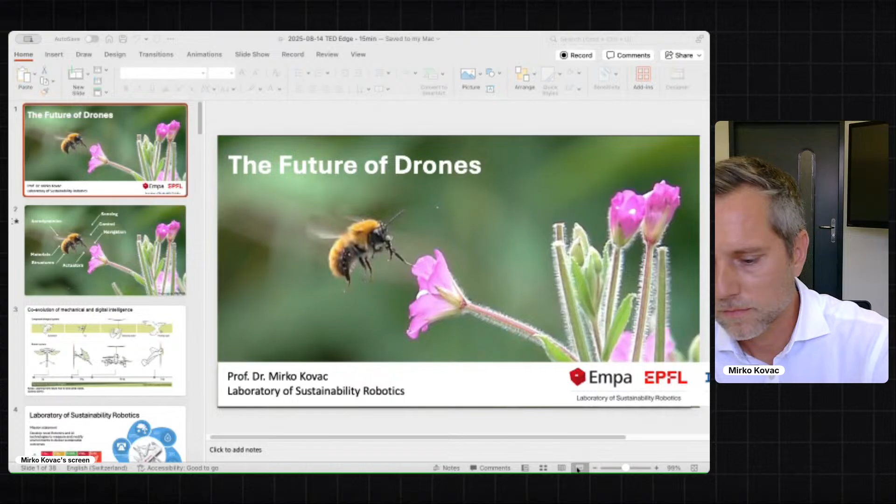The future of drones, I believe, is a lot about biology and about the integration with biology. What we see here is not a drone, it's a natural system - an insect, a flying insect. There's a lot that we can learn from them, for example how they fly, how they're built, and how they operate in unknown, constrained outdoor environments. There's a few things that they do very well.

For example, they combine sensing, control, and navigation. Sensing from their antennas, their structures, the sensory system, from the eyes, from the other sensors that they have. They then control it with neural networks and navigate using various modalities. And then they integrate this with aerodynamics and very complex flapping wing aerodynamics, in fact, which they master very well.

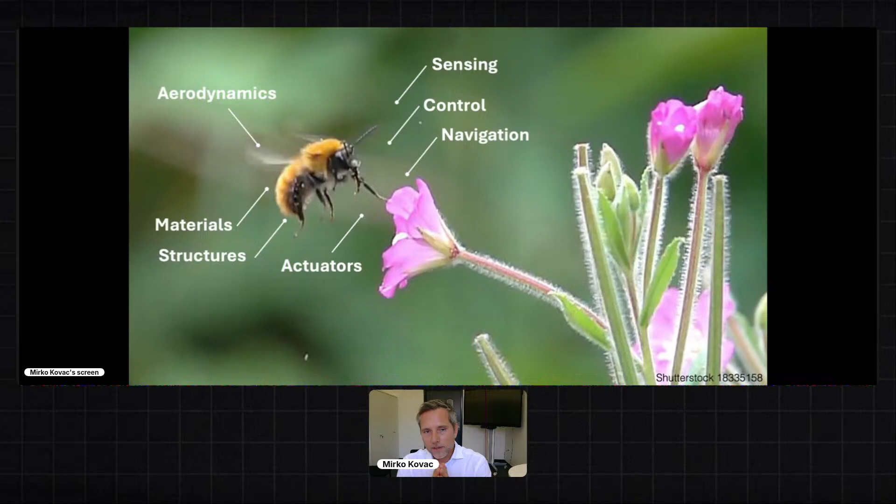They also use various materials, soft structures, actuators and muscles to allow them to fly, move, and engage with the environment. The important thing here, I think, is that they co-evolve all of this. They don't start with an empty shell, a body with motors and actuators, and then add the control onto it. They co-evolve the learning, the control, the sensory system, the muscle system, and the structures and materials all together as they grow, as they interact with the environment.

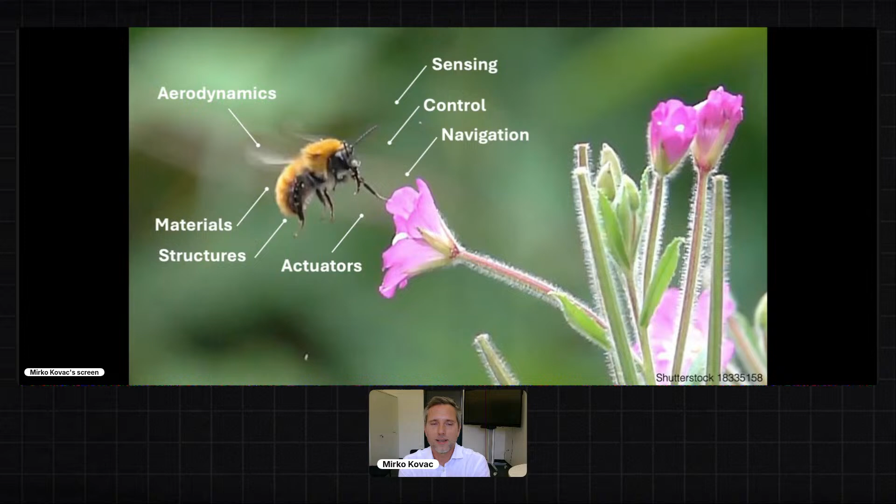I think this is something that is often missing in the way robots are built. Robots often start in simulation, then get tested in a laboratory, and then get translated outdoors in a rather linear manner. But here we have very much a circular development philosophy, if you can call it that, which allows these insects to move very efficiently outside.

But I think we can learn a lot and also develop robots in a similar manner. If you take an example of a robot that attaches to a surface, that wants to perch and land on the surface, like the perching eagle, we can build that into a robot using a control system and sensor system, allowing it to pitch up and do a deep stall maneuver to attach to the surface. This requires control, sensing, planning, deep stall maneuvers, flight control, and so on.

However, when we get very small in size, such as the RoboBee, which is less than a gram in mass, we can benefit from other methods. In fact, we can benefit from the mechanical intelligence methods that many insects use. Bumblebees or flies, for example, use their antennas and legs to adjust and attach to the surface. It's a mechanically mediated transition where the mechanical body and morphology are used to enable this transition, making it a mechanically intelligent way of doing so.

So we can think of this as a spectrum from mechanical intelligence to digital intelligence. And I believe that if you want to create lifelike vehicles, lifelike robots, we need to integrate and benefit from both to create a true lifelike intelligence.

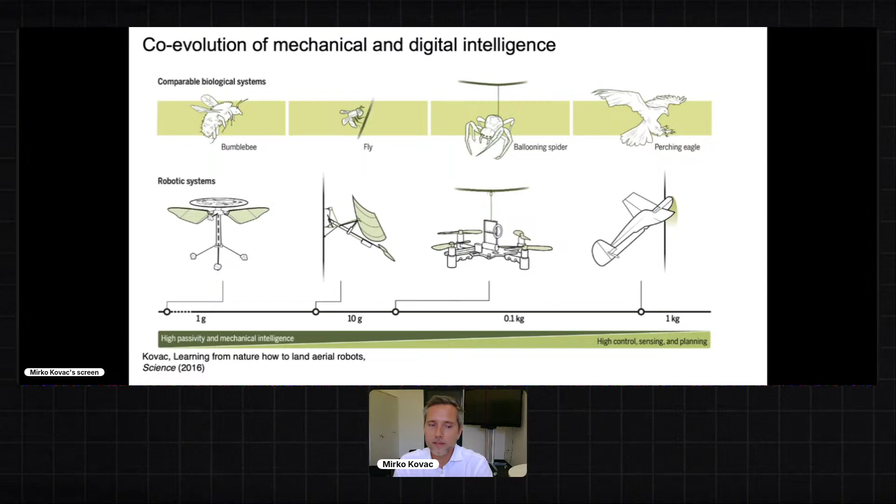This is exactly what we have been working on for about 15 years in the laboratory at EMPA and EPFL, but also previously at Imperial College London in the aerial robotics lab that I was setting up and leading before that. The idea is to create a robotic Swiss army knife, a robotic capability that can collect data and monitor climate, water, forests, smart cities, infrastructure, and also interact with and modify those environments.

For example, doing repair tasks or other tasks like planting, smart agriculture tasks, forest health, forest maintenance tasks to really protect and maintain those environments. Now, if we want to do that, we need to be able to deal with various environments. And one of those environments, of course, is air.

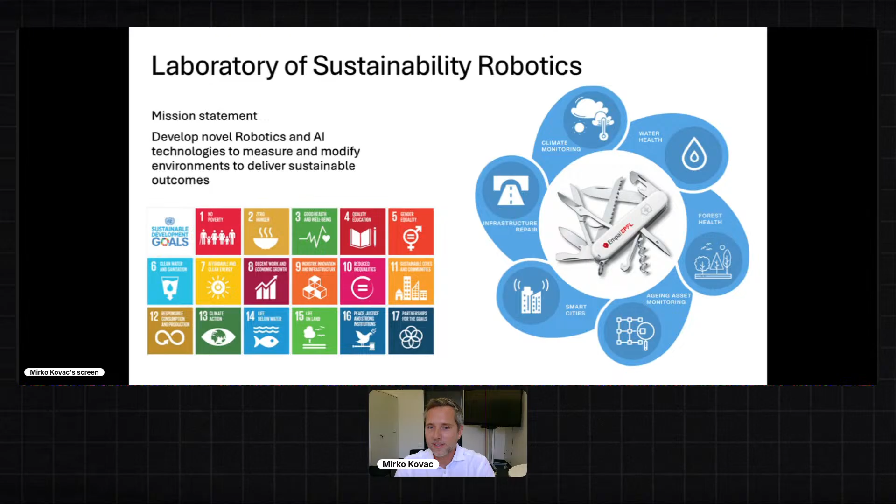Air is a very natural environment for aerial robots, but it is very complex because of the fluid mechanics, turbulence, and so on. So here's an example of how we think about sustainability robotics in an aerial domain.

We can have a flying vehicle that then launches small sensory vehicles, sensory agents, like micro robots that are being deployed in the natural environment. Those agents then sense the environment, sense the biodiversity, sense physical parameters like temperature, light, irrigation, and so on, and can provide the intelligence needed to get insights onto the climate and onto the biodiversity in those environments.

Eventually, those vehicles can not just be manufactured and then be used, but they can also biodegrade, so they can have a targeted death in the environment, then integrate back into the material of the ecosystem, so being compostable or biodegradable, and then eventually even regrowing. So can they heal? Can they reproduce in a way that they would regrow and then be used again?

So this is the larger vision for this approach, which we call the transient robotic life cycle, where the robot is like an animal integrated into the natural life cycle.

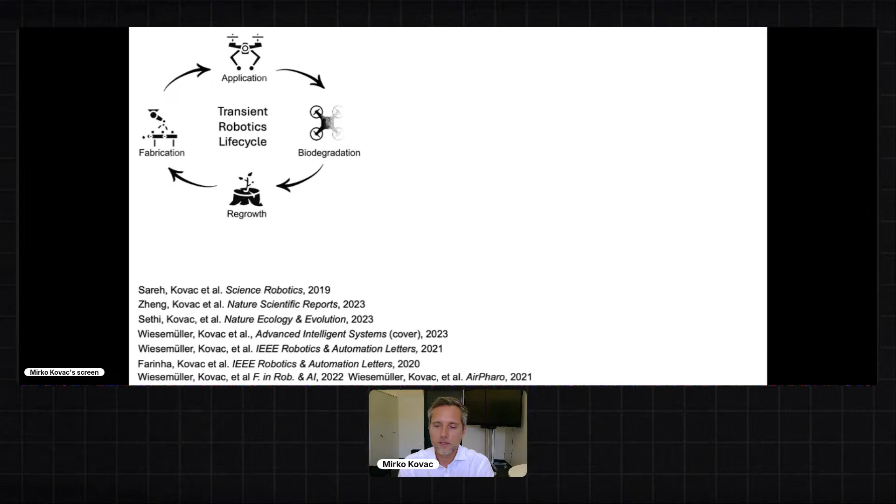So here's a robot that does part of that, which is to fly, then detect a spot where it wants to place a sensor, and then can launch a sensor, model the trajectory, and place it with a precision of a few centimeters at a few meters distance.

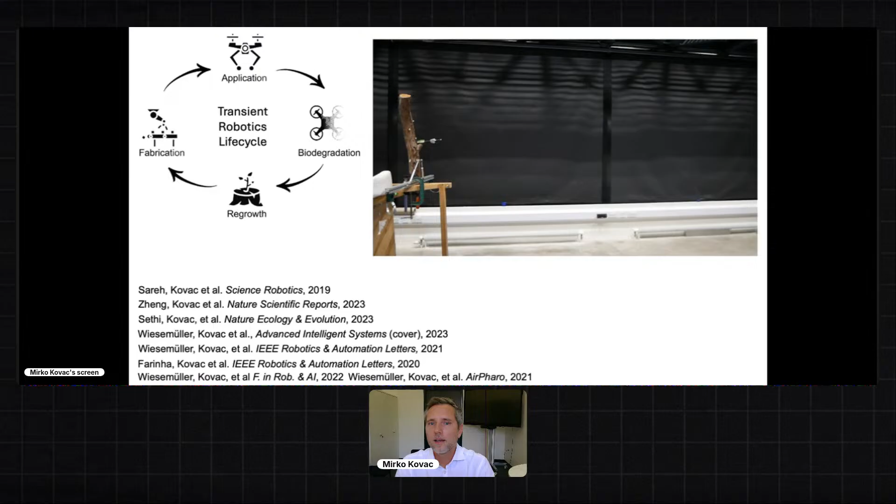This allows it to place those sensors quite effectively at height, where usually people would need to climb up and place the sensor manually, which is expensive, risky, and time consuming. Because of that, a lot of the environment is undersampled, so not enough data is there.

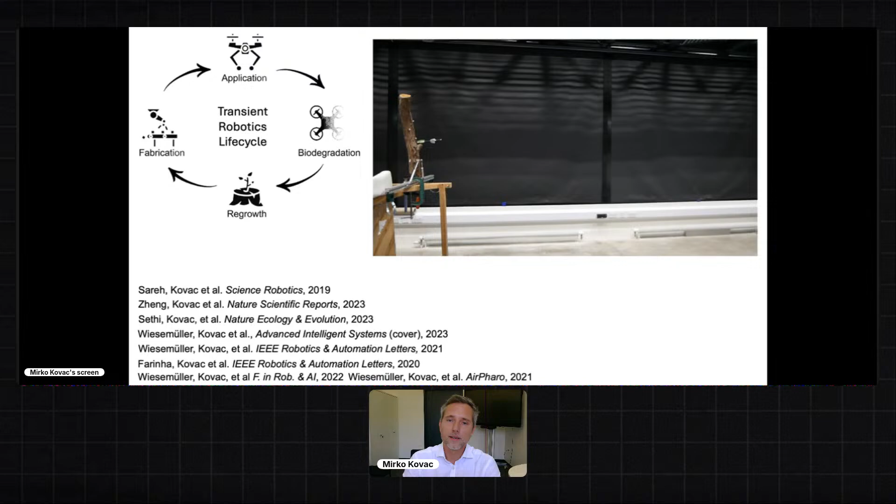But by using flying vehicles, like here in the forest, that would then fly and place those sensors, we can collect data that is unprecedented, data that is novel and abundant, allowing us to measure the biodiversity and various environmental parameters.

Which environmental parameters do we want to measure? Of course, it can be various physical or biological parameters. Maybe it could even sample the surface of the tree.

But the first modality we went for in this example is to measure the bioacoustics. So this means it has a microphone, then collects environmental data, and this data is then analyzed using machine learning algorithms to identify which bird species are there and how many of each species are there.

There are two parameters called abundance and species richness, and we can measure that across the layers, so across the height or in the canopy here in the trees. Basically, this allows us to study and quantify where the birds are and how many there are.

This is a really important metric in order to study how climate change influences the bird populations, how noise pollution influences them, how chemical pollution or human activity influences them. And by knowing that, we can better protect those environments.

So the robot becomes a tool that allows humans to collect data quickly, get insights, and then design the policies to really protect those environments.

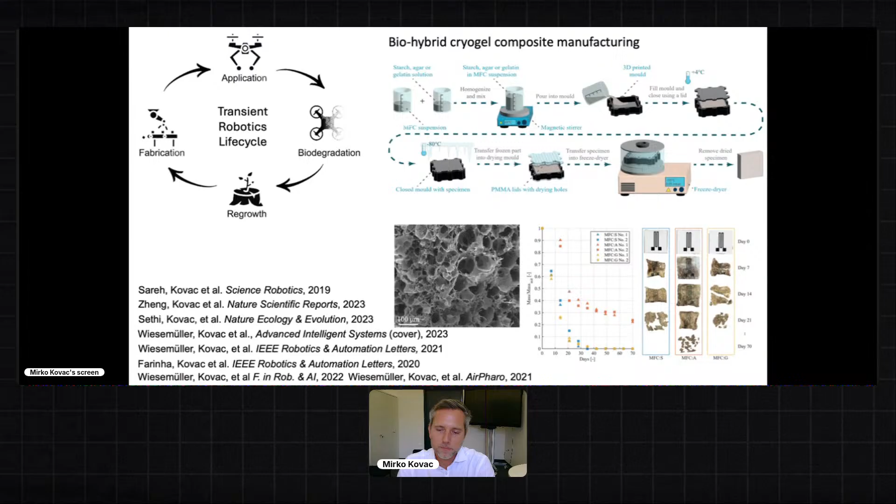Eventually, in the near future, this is about having static sensors, static robots that just sense certain parameters in the environment. But in the mid to long term, they can become agents that are robotic by themselves, that move through the environment using environmental vectors such as rivers or animals, but also move by themselves using humidity-triggered actuation or other methods that are fully materially enabled without the need for motors or batteries. The material science itself informs or enables the structures to move or adapt, becoming intelligent robots in those environments. There are a lot of open questions to achieve that, but it's a really promising field developing now internationally.

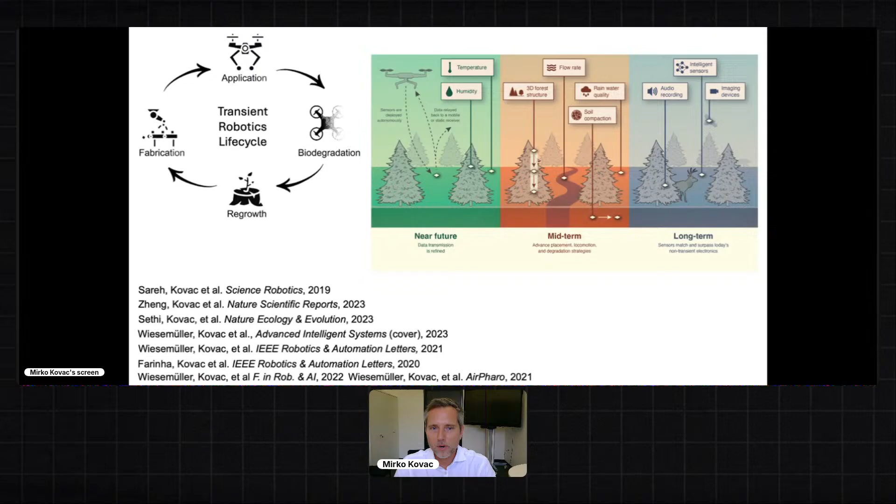The second environment, which is also very important for us, is water. In the water we want to measure, for example, temperature or acidity, which is important for coral reef protection, but also biodiversity - knowing which animals are there, what microbes or microorganisms. Are there any invasive species that don't belong to the ecosystem? Or is there microplastic pollution or chemical pollution in those environments? Can we collect environmental DNA to measure and quantify what is happening inside the water?

This is something we've worked on for many years now, about 15 years. We wrote a book, which you see here, and some papers related to that. The overall vision, shown in this top picture, is building completely soft metamorphic robots that can fly in air, but then transition into the water, move underwater, and transition back to flight, or transition into sailing abilities, saving energy for long duration sampling of the environment.

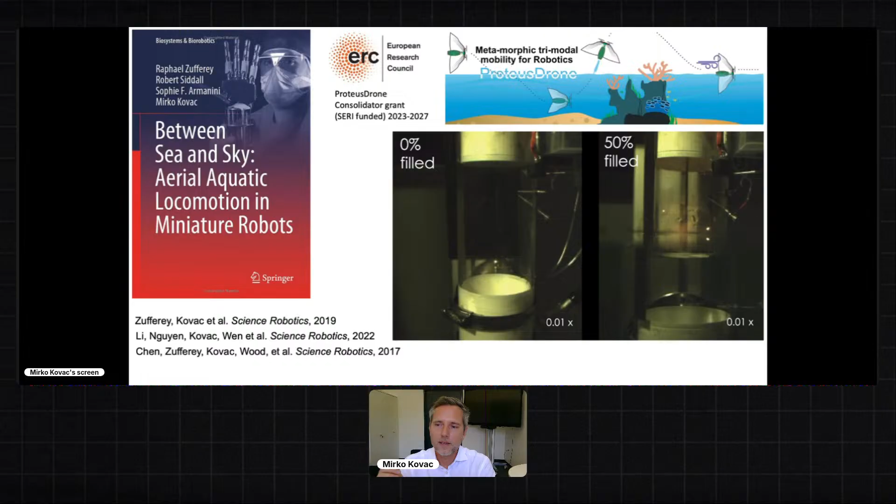Let me give you 2-3 examples here. Number one is this idea to have an impulsive exit from the water. We built a system where we use calcium carbide that reacts with water, creating acetylene gas. This acetylene gas mixed with air can then be ignited and can eject the water from the body of the robot. By doing so, it can boost the vehicle from underwater into the air quite efficiently and effectively, with a very high thrust boost - a bit like a water rocket that has a combustion to boost the water out. You have the spray, then the gas jet that follows, and then a glide phase of about 26 meters using only 0.3 grams of calcium carbide. It's a quite powerful combustion that is happening.

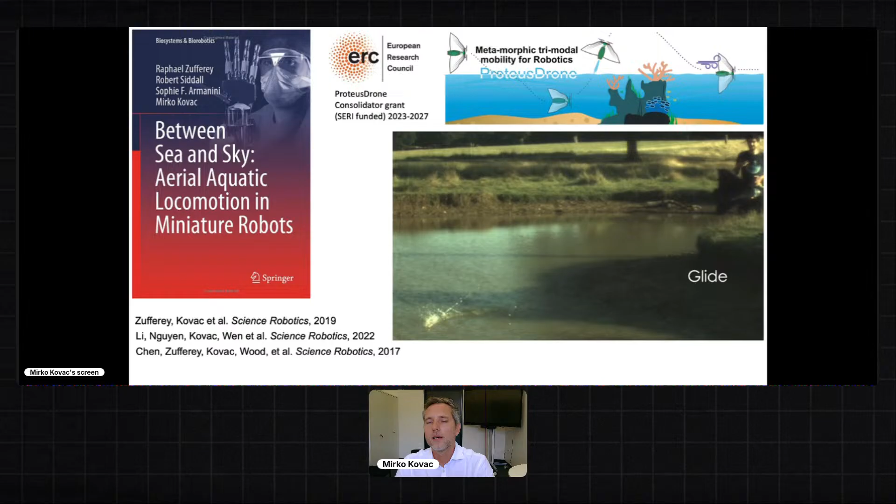Similarly, in collaborative work here with Harvard University, who work on this RoboBee - the size of a real bee, but a robotic vehicle - we looked into ways to have this transition happen effectively. Here it uses an electrode that splits the water into hydrogen and oxygen, which can then be ignited, again giving a bubble that bursts out of the vehicle, allowing it to jump out of the water. Again, impulsive transition from underwater to air using combustion-based methods, which are very high power, and can be used for that quite well.

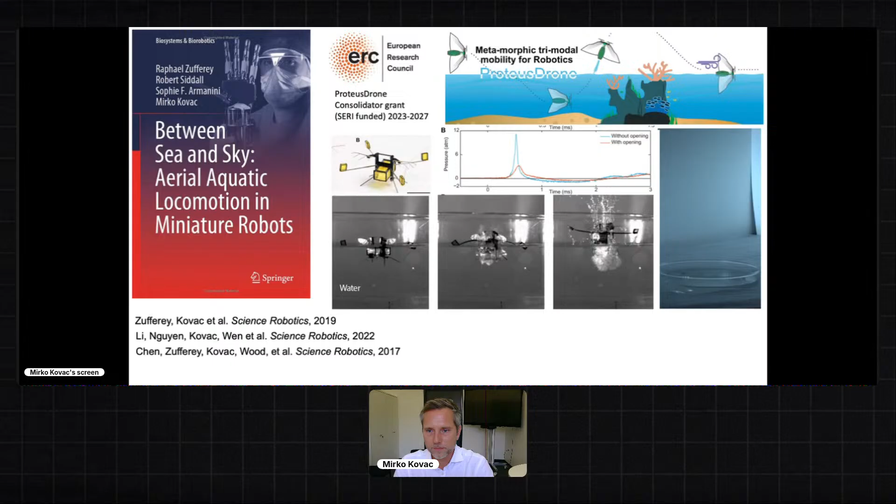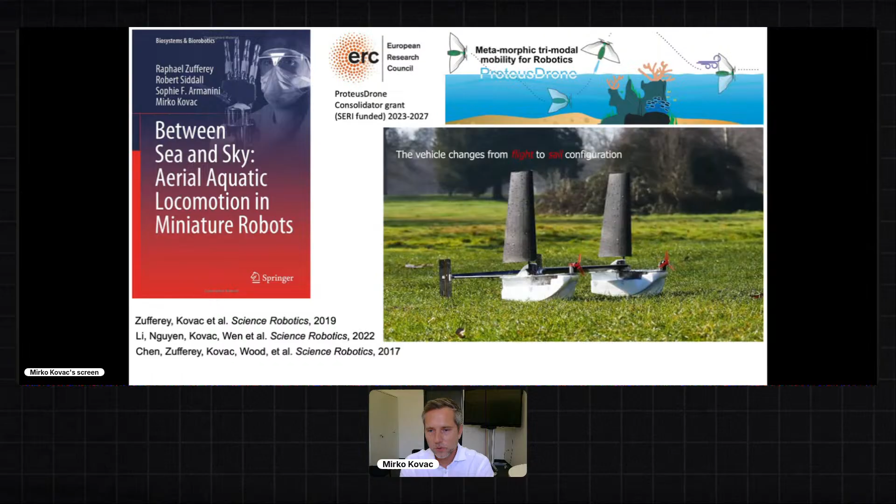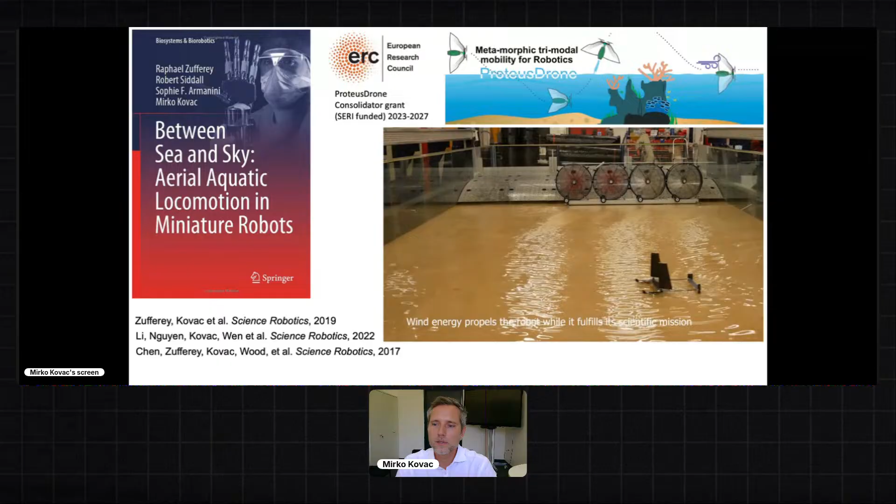Now, once in air, it can keep on flying, or it can land on the surface and then sail. To study this transformation from flight to sailing, we built this SailMAV vehicle - sailing micro-air vehicles. The idea is that it lands on water, reconfigures into a sailing configuration, and then uses a custom flight controller to sail on the water surface autonomously.

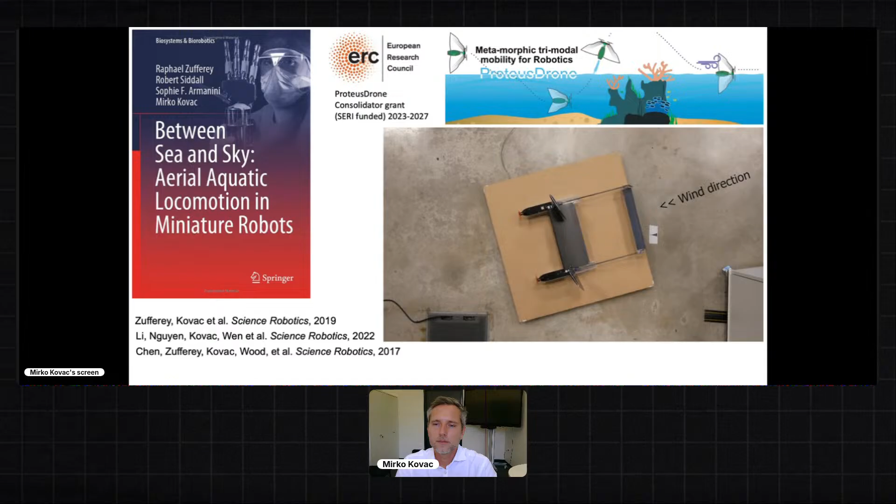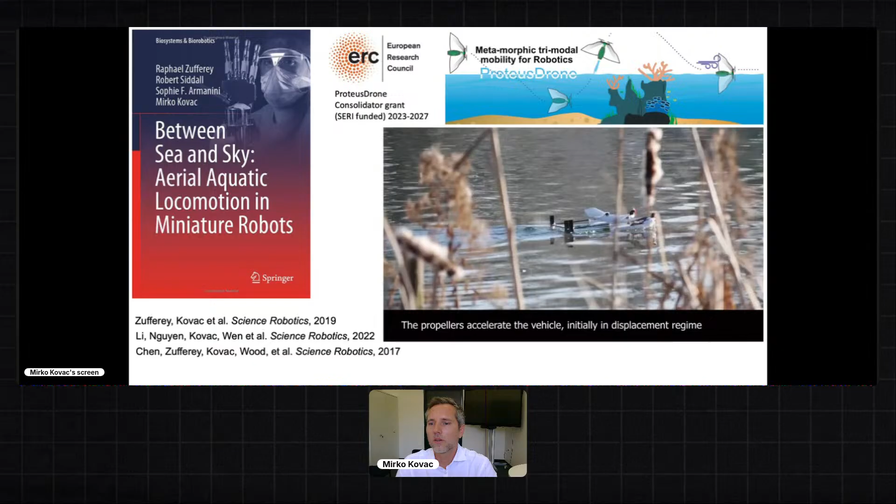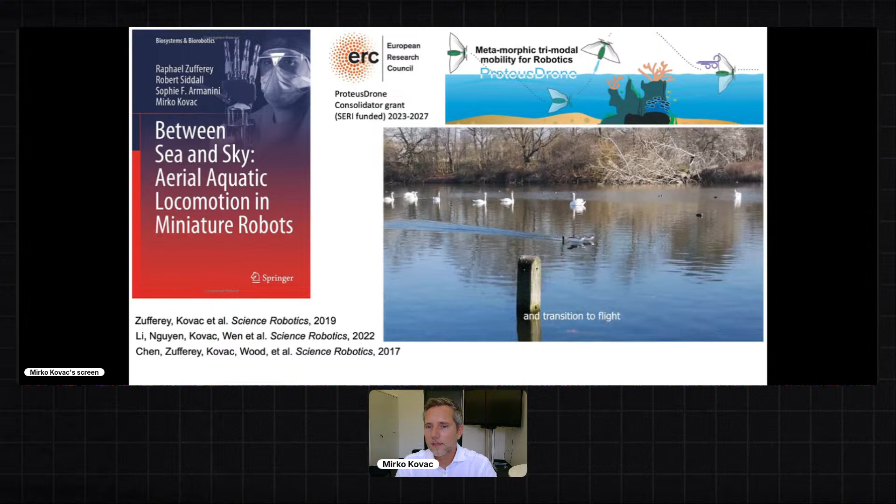The vehicle itself is built from scratch - the design as well as the manufacturing of the wings, the structures, the fluid mechanics, even novel sensors that needed to be integrated, and the flight controller are developed specifically for this vehicle. It then enables motion on the water surface using propellers or sailing, then transitioning into hydroplaning and ground-effect-assisted takeoff. A lot of the fluid mechanics is not known at this scale, so we had to do a lot of fluid mechanics studies to understand and optimize the vehicle.

This vehicle, I think, is a good example of how we can think about sustainability robotics, where we go all the way from concept to systems to data-based insights. Here the concept is aerial aquatic transitions, reconfiguration for sailing. We then build the robot, optimize it, test it in the laboratory, test it outdoors, and collect environmental data like soundscape data.

This gives us insights onto the bird populations in summer and winter in disturbed and protected environments, showing that there is a quantified measurement of increased bird species populations and diversity in the protected environments across seasons. This is a valuable insight that really helps us protect and accordingly make policies to protect those environments.

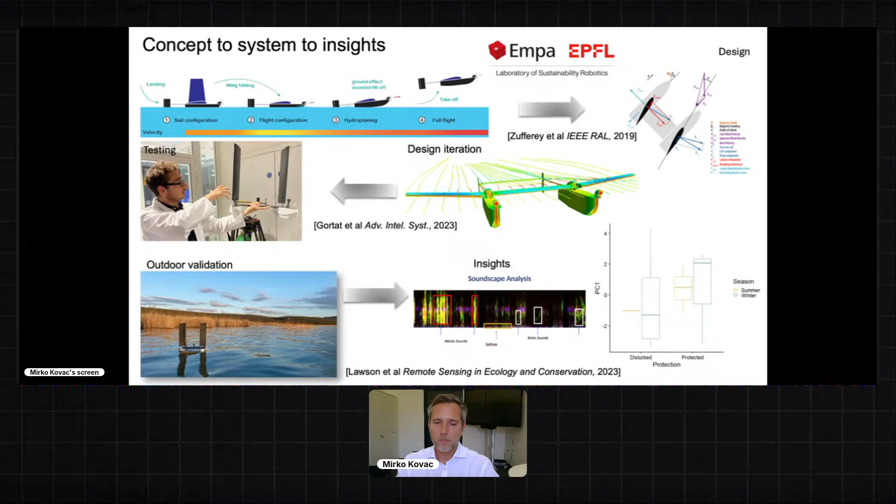The third environment is, of course, Earth. And the question is, how can we do Earth shaping? Can we use Earth to manufacture structures? Now, this is something we are also working on for about 13 years now.

We built various robots with the idea that they would collectively 3D print structures from flight. So they would fly, maybe collect environmental material, and then print and 3D print those shelters, support infrastructure, habitats in inaccessible environments here on Earth, but also maybe on the Moon, and also in inaccessible mountain environments or natural environments, or anywhere at height where it is dangerous and difficult for humans to access.

Of course, naturally, we start with the biological review of how biology builds, and there's a few key methods that biology uses that can be really very useful for robots too.

For example, using templates, which is using local initial conditions for the manufacturing process, and then robotic rules or instincts that allow it to scale from those initial conditions. Equally, decentralized controllers with emergent properties based on the material or mechanical design of the robots, or local interactions with the environment or with the agents themselves can allow for emergent properties in the construction process.

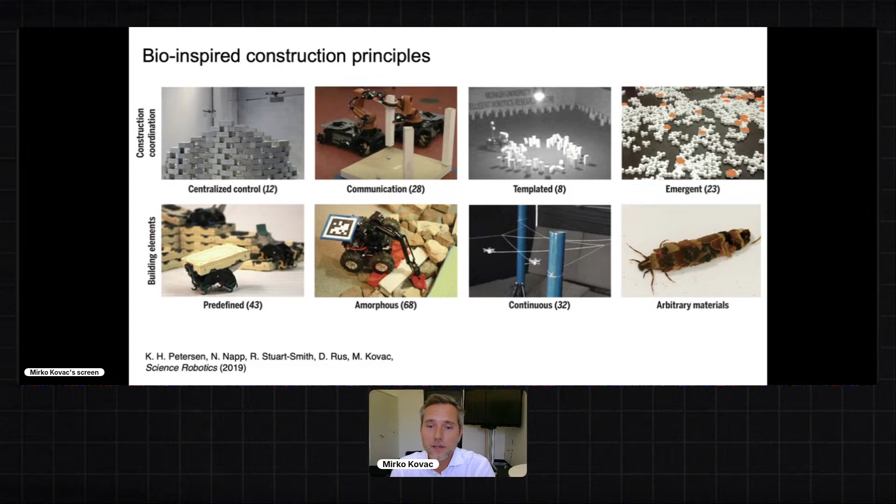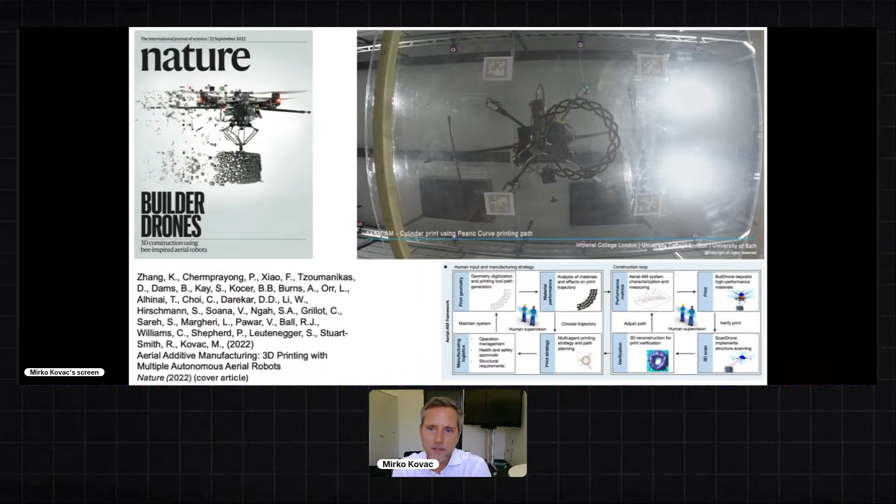So the robot we built, here an example, is a flying vehicle that can stabilize an extrusion head and deposit material from flight. Here it does that with a precision of a few millimeters and can extrude high-performance cement material to make layers, and like this make and build larger three-dimensional structures. So this is aerial additive manufacturing, or aerial 3D printing, as we also call it.

It is autonomous. It uses its own controller, its own design of the mechanics, its own architecture of building, and its own material that all needs to be co-evolved in order to achieve that.

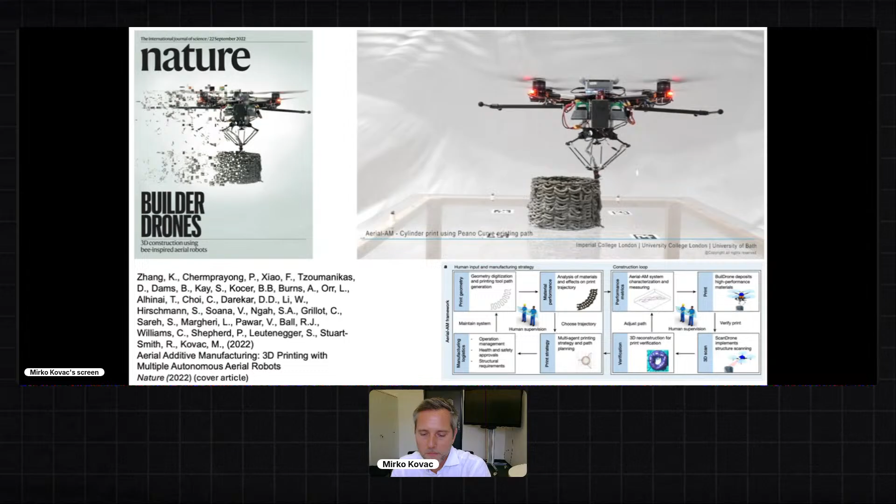So if you use a different material, such as here polyurethane foam, we can do so and then build structures maybe even at larger scale, because the material expands, and like this can give layer heights that are higher. The problem is, however, that the material expansion is very difficult to predict.

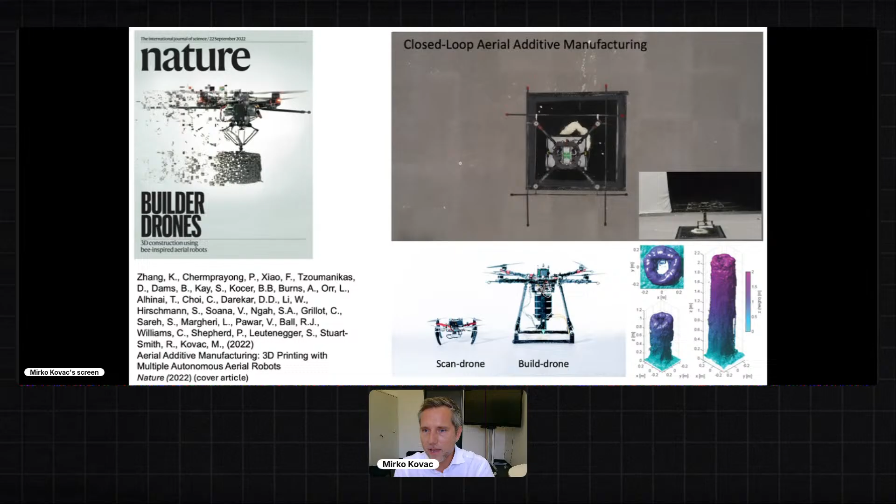So it could expand, but then we need to adjust the next layer of the printing process accordingly to then have the next layer in the process.

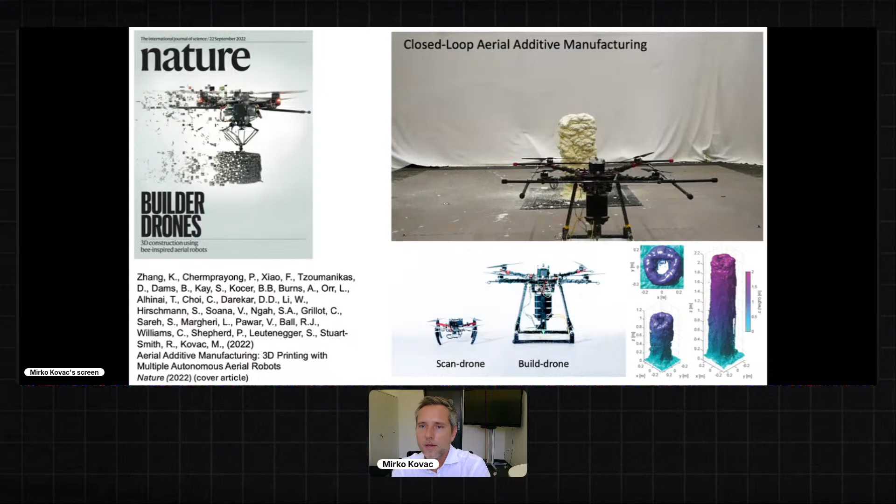So this is what we call here the closed loop aerial additive manufacturing, where the scan drone, so the scanning vehicle, collects the three-dimensional information and extracts the ridge line and adjusts the printing step such that it can scalably build different layers and build larger structures.

So the goal is really to have the monitoring of the process, the quality control, and adaptation of the process in the loop.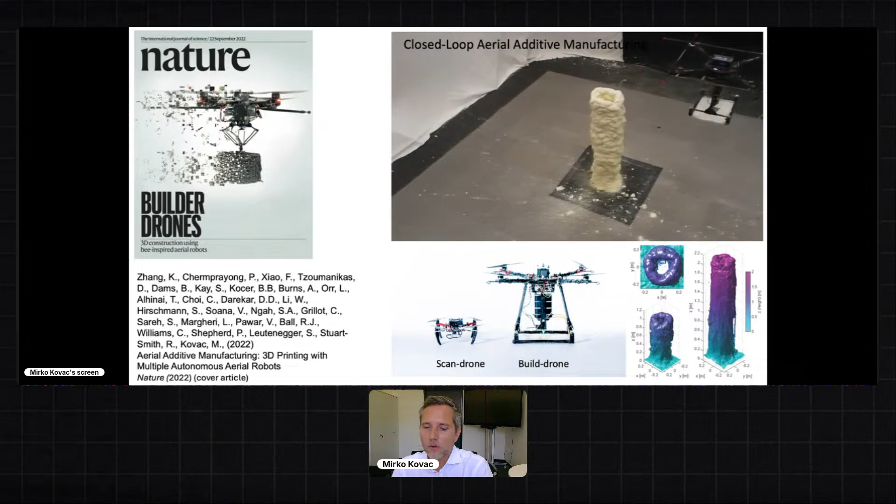We also went to the Architectural Biennale in Venice in 2023, where we showcased that with the question of how such a process could really affect architecture. So how can architects now build differently, assuming the capability that we have swarms of those flying vehicles that collectively can build larger structures? So it's a new method which allows for new design freedoms as well.

And I think this question is a very interesting intersection of architecture and robotics.

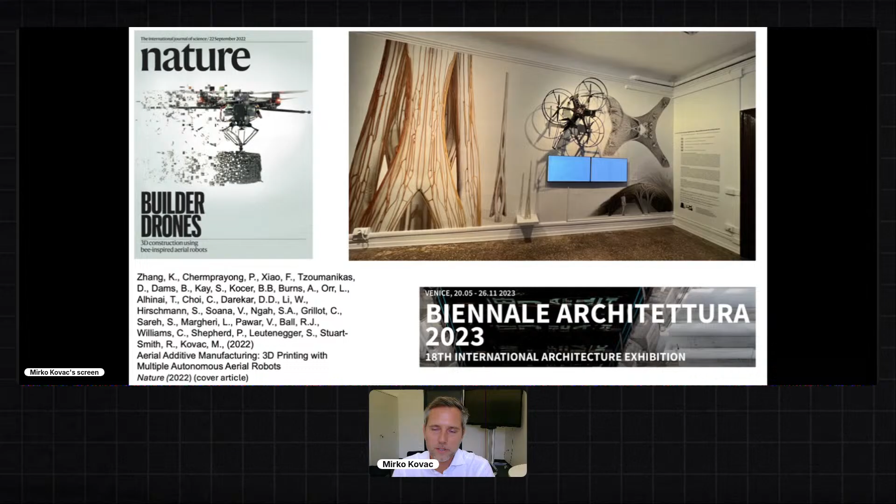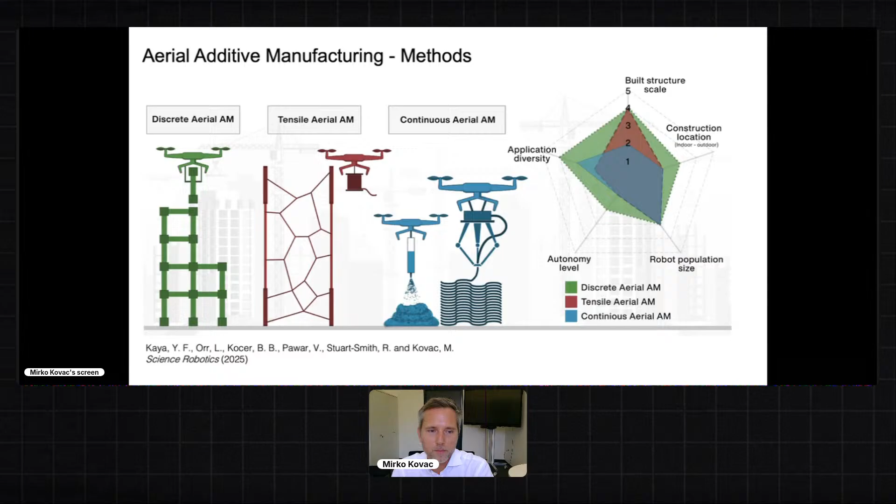Now, besides this continuous aerial additive manufacturing, there are also tensile, like web structure manufacturing, or discrete assembly of structures. And we work on those as well, but for time reasons, don't include them here.

What I would like to mention, though, is the autonomy, whereby most starts with just a simple pre-programmed trajectory, then the aerial physical interaction, or maybe online flight planning and manufacturing task planning. So this is a lot of pre-programmed behaviors.

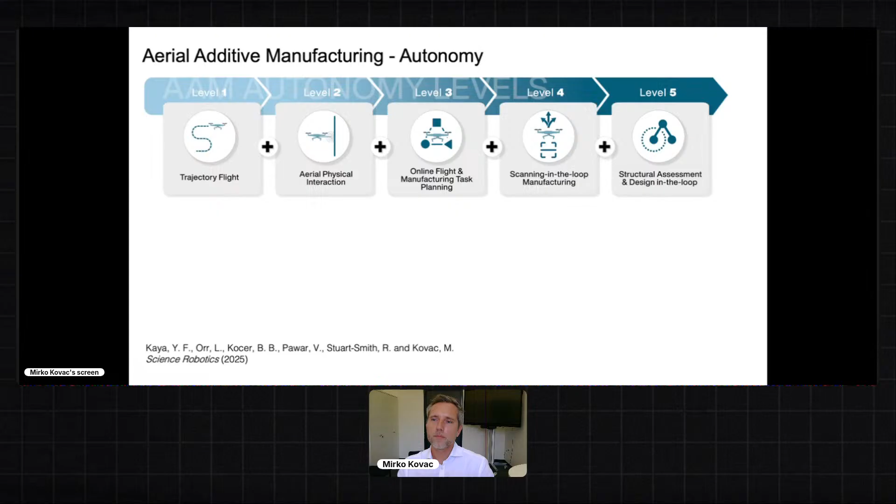But at level 4 and 5, we get into closed loop or multi-agent scanning in the loop manufacturing, where it scans and then adapts the process, or even does a full structural assessment and design in the loop. So can robots do the whole design process based on what they have built already?

So most of the work in this field is actually about level 1 and 2, and maybe 3, and we are now starting with this level 4, with this scanning in the loop process, with the goal to then go to level 5 of fully autonomous design and structural assessment in the loop.

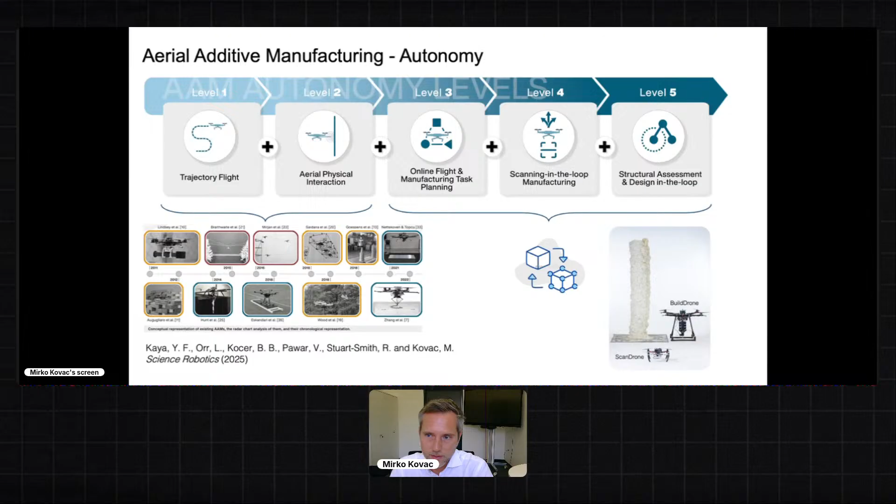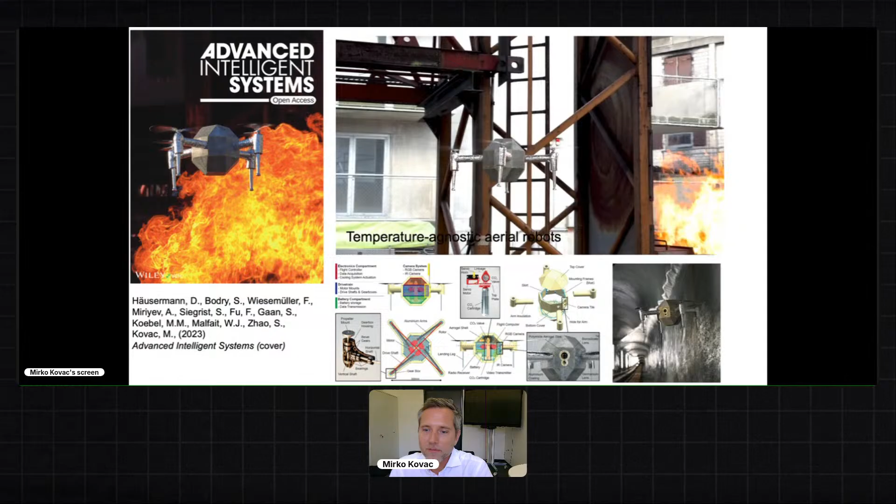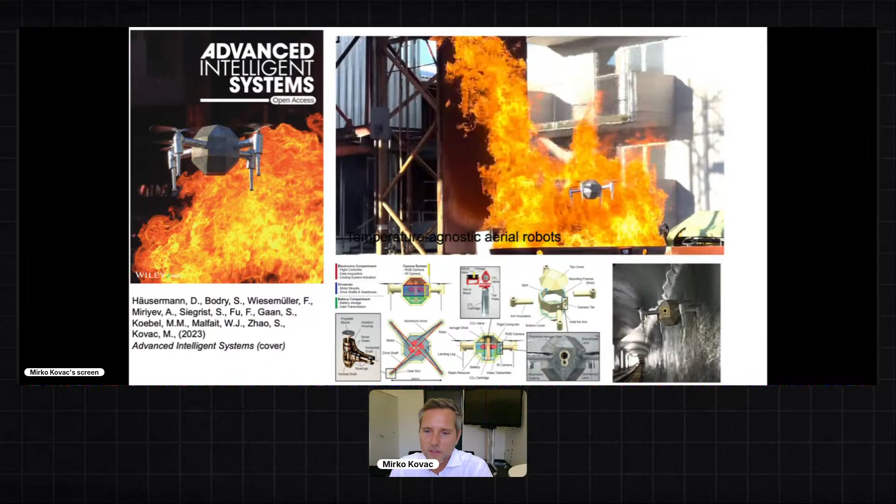So the fourth element is fire. And fire, of course, is challenging and has inspired us to create a robot that can fly inside of very hot environments or in and around fire. The system here is built using a novel type of material called fiber-reinforced polyimide aerogel, which is very heat resilient, and combined with a cooling system and the mechanical design of the robot, it can allow the vehicle to fly in very hot environments, above 200 degrees, where it can monitor forest fires, building fires, or hot industrial environments.

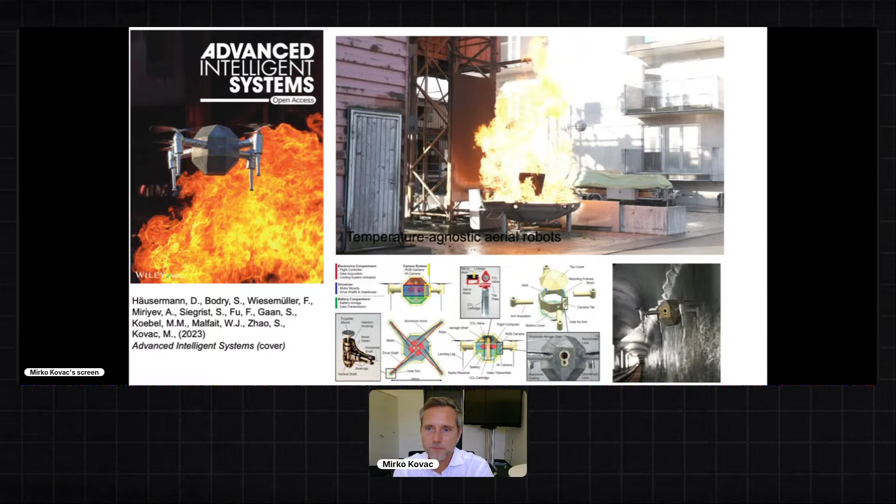This is something we have been working on for quite a few years, and we are now also doing a spin-off called Fire Drone, which has received quite a lot of support and industrial traction. It's really an example of how novel drones with co-evolved materials, structures, and applications can bring value, being lifelike systems for inspection of challenging environments.

This really brings us to the fifth element. Now, what is the fifth element? It's the innovation, the creativity, the free mind that can manifest these different ideas, various robotic and AI solutions, to the world. But it's also an element that connects people, that aligns ideas and visions of different people alongside the applications and the value chain in society.

So I'd like to mention two aspects of that. The first is the philosophy of development of those vehicles. We wrote a paper a few years ago on this co-development of material science, robotic structures, chemistry, computer science, and materials to create those lifelike robots. This co-development method we call physical AI.

The second aspect is bio-inspiration. In 2014, I wrote a paper on how to do biological inspiration, calling it the bioinspiration design paradigm, where we take inspiration from biology, then abstract the principle, then build it into the robot using the best of our engineering knowledge. I think the combination of this design method with the co-evolution of disciplines is the key to creating lifelike robots.

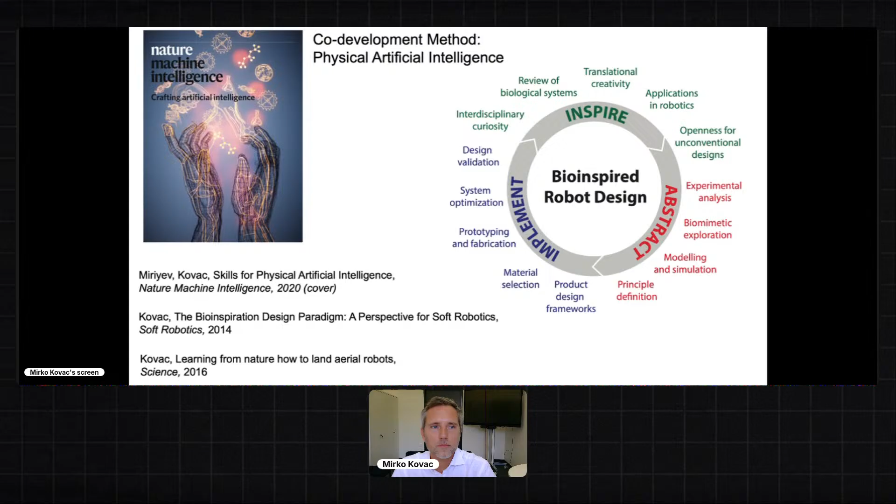The second aspect I would like to mention is the testing infrastructure. There are a lot of indoor test environments, flight arenas, and so on around the world, and a lot of outdoor environments as well. But there is really a gap between them, of environments that are protected, instrumented, but representative of outdoor environments.

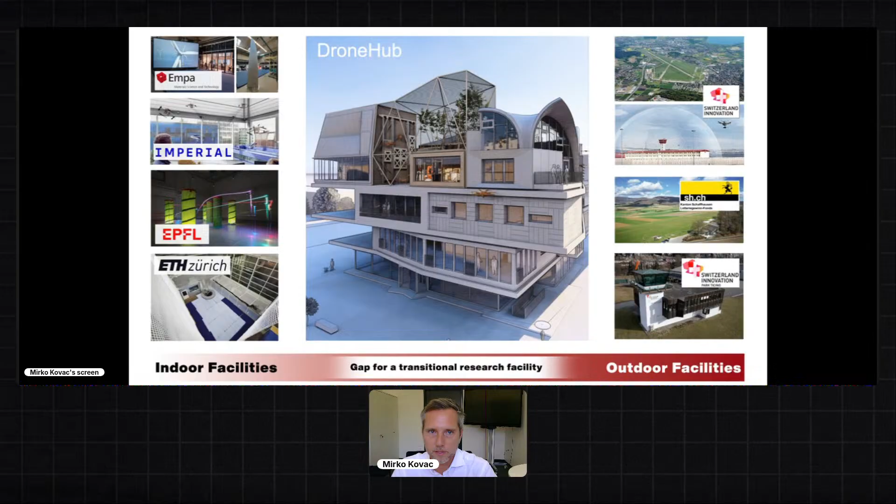This gap we are now filling by developing the Drone Hub. The Drone Hub is a new type of test infrastructure located at Empa in Dübendorf, next to Zurich, where we can test novel types of robots in a representative, highly visible, and integrated way with humans and other technologies in the building sector. It has three innovation elements.

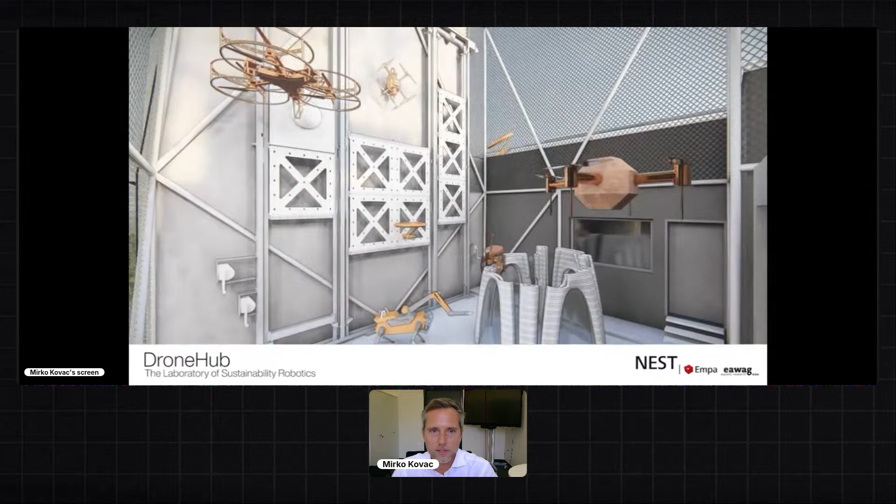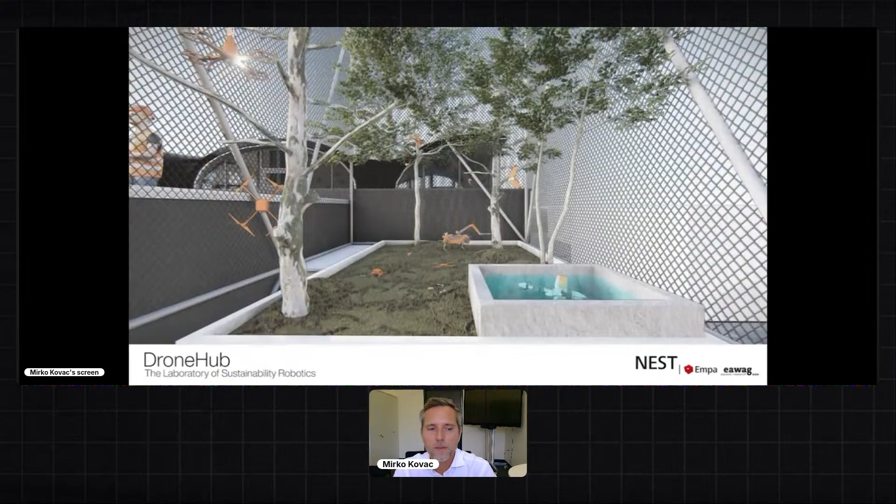One is the aerial additive manufacturing facade, where you can do repair and manufacturing tasks with the robot. The second is the biosphere, where you can test biodegradation, sensor placement, and biodiversity monitoring. The third is integration with the facade, where the facade can become adaptive and integrate with the robot's motion, sensing, and interaction with the building itself.

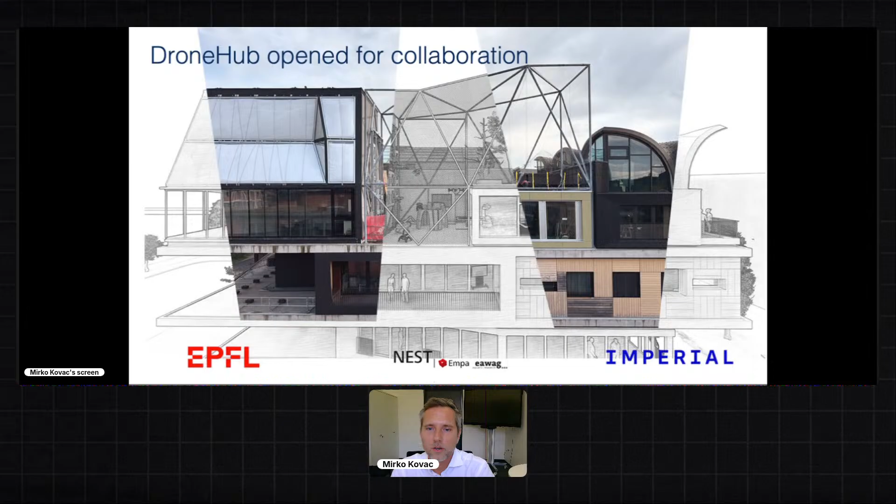So all of this is a showcase, an opportunity to study how together as a society we can demonstrate those systems. The Drone Hub is open for collaboration. It is built - that's a photograph of it in the background. We opened it last year, so it is open for ideas on doing that impact together.

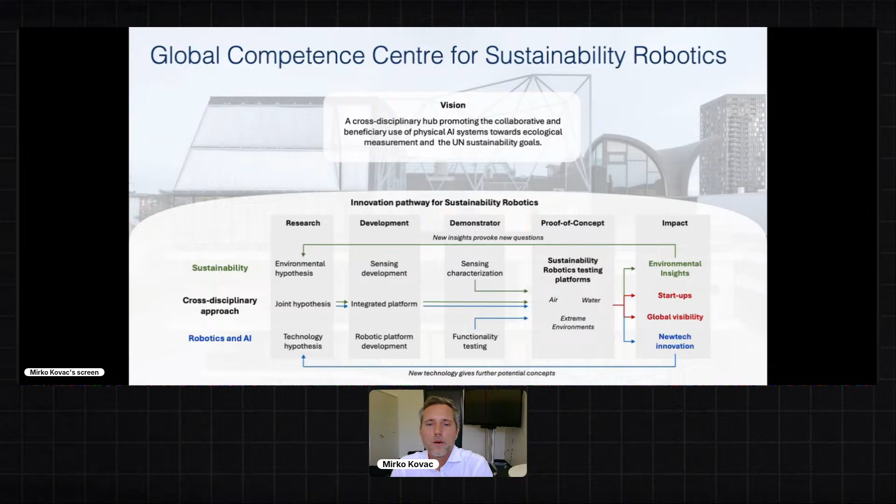This is all part of the Global Competence Center for Sustainability Robotics, which we have launched, where we combine sustainability science and robotics science on the research, development, and proof of concept level to create global visibility, startups, insights, and new technologies, forging the path forward for a new impact of robots as key elements of a sustainable future. With this, I would like to thank the funders, previous lab members working on this very hard, and also you for your attention. Thank you very much.